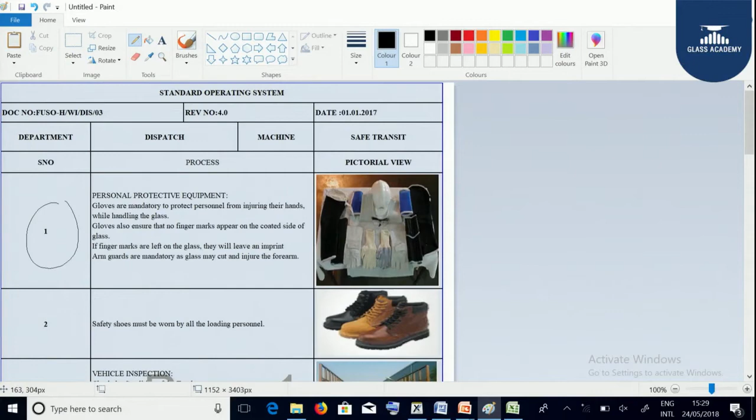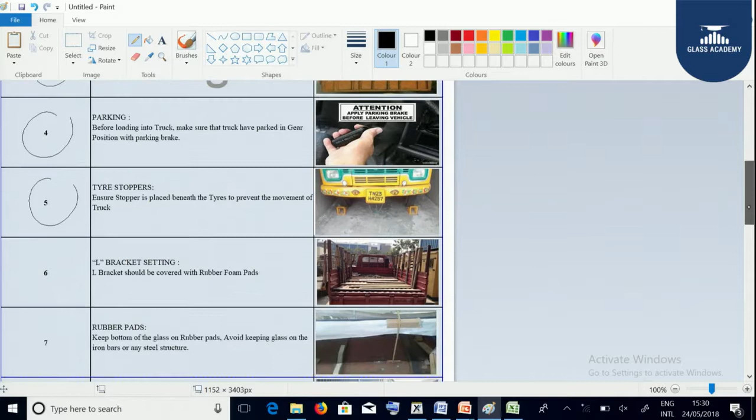Now we are going to understand the standard operating procedure we follow at dispatch. We need to understand the PPEs required at the time of loading, and the safety gear that we need to wear at the time of loading. We need to understand the vehicle and the parking, and we need to have tire stoppers so that we are avoiding the movement of the trolley and the truck. You can see here the stoppers.

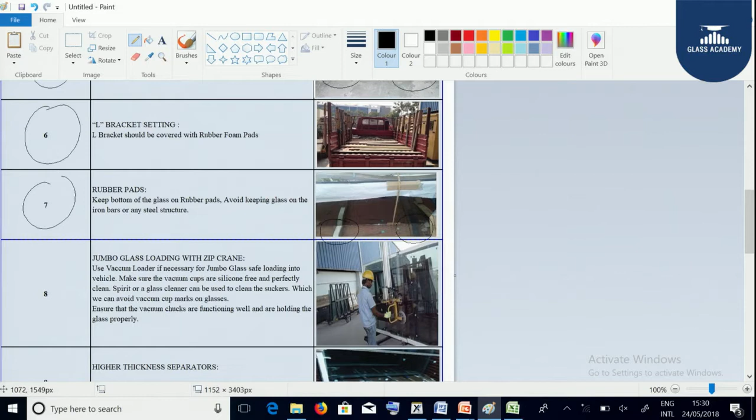Next, the L bracket setting to be used should be covered with rubber and foam pads. Rubber pads should always be used. Keep the bottom of the glass on rubber pads, avoiding glass on iron bars or any steel structure. You can see in the figures the glass is resting on the rubber pads. Jumbo glass loading is to be done with zip cranes to avoid human injuries. You can see here with the help of zip cranes the jumbo glasses are getting lifted.

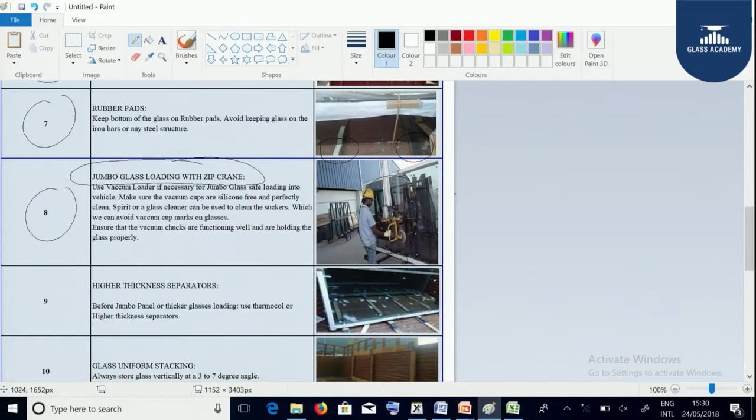And for higher thickness glasses, always use more interleavings. If required, you can even go for thermocol packing so that you are maintaining a proper gap between the glasses. You can see here in the figure the glasses are getting packed with thermocol interleaving. Next, glasses should have uniform stacking, and the stacking should be at a 3 to 7 degree angle.

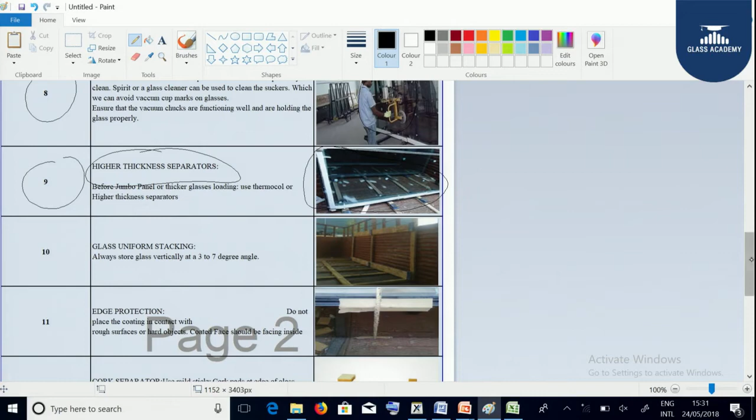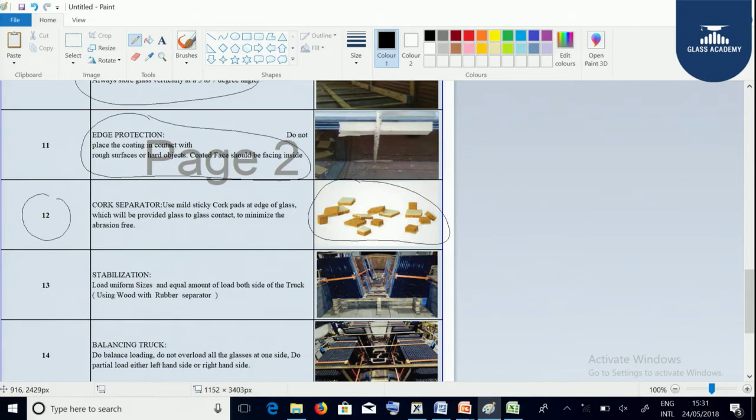And we should make sure that the edges of the glass are always protected with cartons. Between the glasses we should always use a cork interleaving, rubber separator or thermocol. We should make sure that there is stabilization of the glass and the vehicle. Load uniform sizes and an equal amount of load on both sides of the truck using wood with rubber separators.

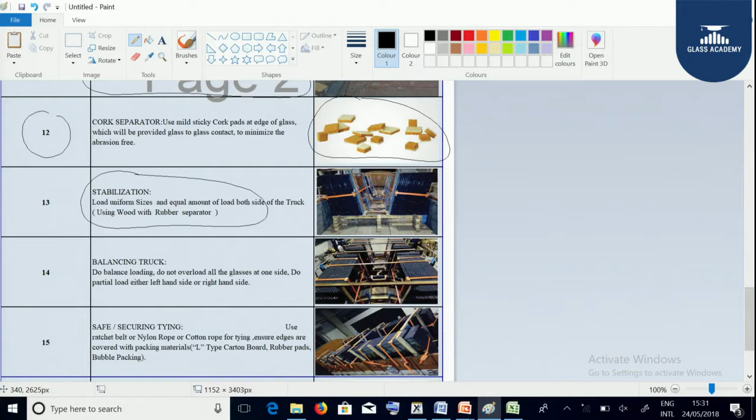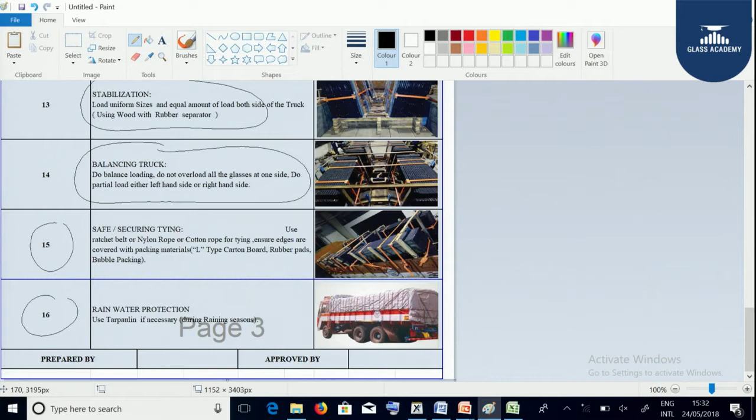Next, we need to understand the balancing of the truck. We should not keep loading on one side of the truck and leave the other. There should always be uniform balancing of the load inside the truck. We should also see how we are packing and tying the glasses and the vehicle. We should use a ratchet belt, nylon rope or cotton rope so that there is no movement of the glasses, and the glasses are stacked at an L angle. Next, we need to make sure that during the rainy season the glasses are covered with a tarpaulin.

Next, we need to ensure the parking. Before loading into the truck, make sure that the truck is parked in gear position with the parking brake. Tire stoppers: ensure stoppers are placed beneath the tires to prevent the movement of the truck. L bracket setting: the L bracket should be covered with rubber foam pads. Rubber pads: keep the bottom of the glass on rubber pads. Avoid keeping the glass on iron bars or any steel structure.

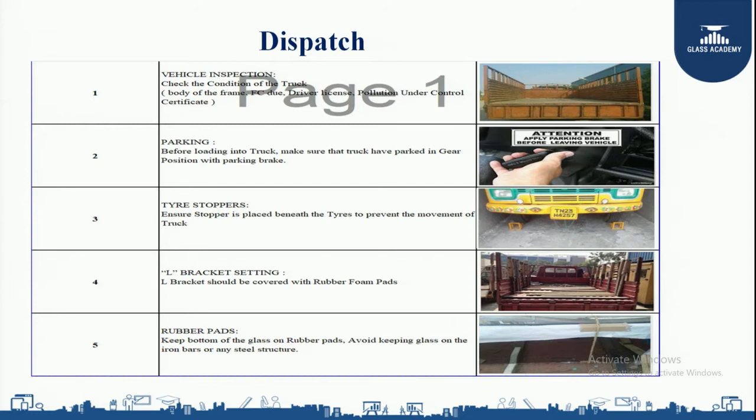When you are doing jumbo glass loading with a zip crane, use a vacuum zip loader if necessary for safe loading of jumbo glass into the vehicle. Make sure the vacuum cups are silicone free and perfectly clean. Spirit or glass cleaner can be used to clean the suckers, so we can avoid vacuum cup marks on the glass. Ensure that the vacuum chucks are functioning well and are holding the glass properly.

For higher thickness glass, higher thickness separators. For jumbo panels or thicker glass loading, use thermocol or higher thickness separators as interleaving to maintain a proper gap between glass and glass. Glass uniform stacking: always store the glass vertically at a 3 to 7 degree angle. Edge protection: do not place the coating in contact with rough surfaces or hard objects.

Coated face should be facing inside always. Cork separators: use mild sticky cork pads at edges of the glass, which will prevent glass to glass contact to minimize abrasion.

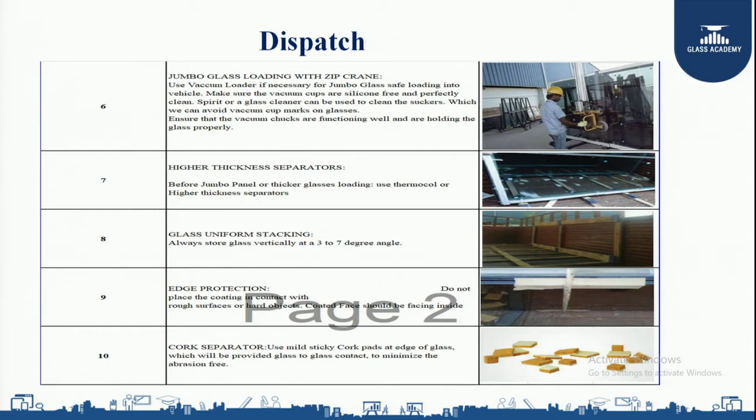Stabilization: load uniform sizes and equal amount of load on both sides of the truck using wood with rubber separators. Balancing truck: do balance loading. Do not overload all the glasses at one side. Do partial load either left hand side or right hand side.

Safe secure tying: use ratchet belt or nylon rope or cotton rope for tying, ensuring edges are covered with the packing material: L-type carton board, carton board or rubber pads, bubble packing. Rainwater protection: use tarpaulin if necessary during rainy seasons.

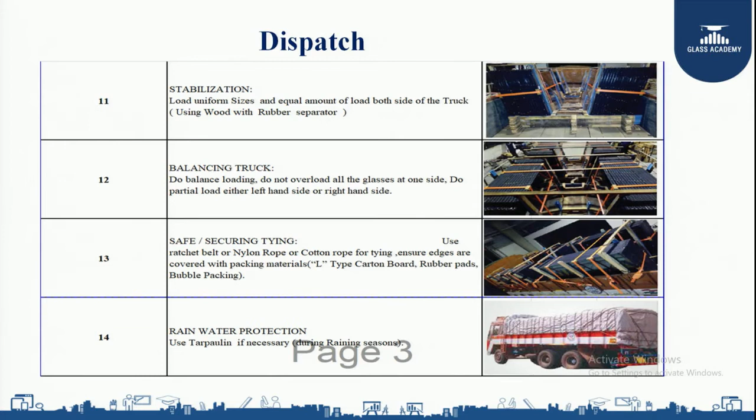And whatever we have discussed so far, we are incorporating in our final inspection report. It says, first the customer name, the order details, the destination, the project name, the dispatch quantity, the work order quantity, transporter, vehicle number, the description of the material, whether it is an annealed glass or a toughened glass or

a laminated glass or a double glazing unit, whether the glass is having any scratches or chipping, back support is properly provided, any coating defect is there, pinholes are there, glasses are as per drawing, sizes are verified. If it is a double glazing unit, primary sealant, secondary sealing, all these are checked in the final inspection.

Next we will be checking the packing system, open packet dispatch or a crate packing dispatch. We are also ensuring what separator we are using, whether it is a button separator or a paper separator, how the loading pattern happened, that is from bigger to smaller,

what type of cushioning is given to glass, how we are going to tie the glass, belt or rope, polythene is covered or not, back support is given or not, wood stabilization is given or not. All this we are ensuring at the time of packing.

As we have discussed, we are even recording the truck conditions, whether it is a half body or full body, wood flooring or iron flooring, capacity in tonnage, floor condition, tarpaulin, angle, vertical and horizontal strapping.

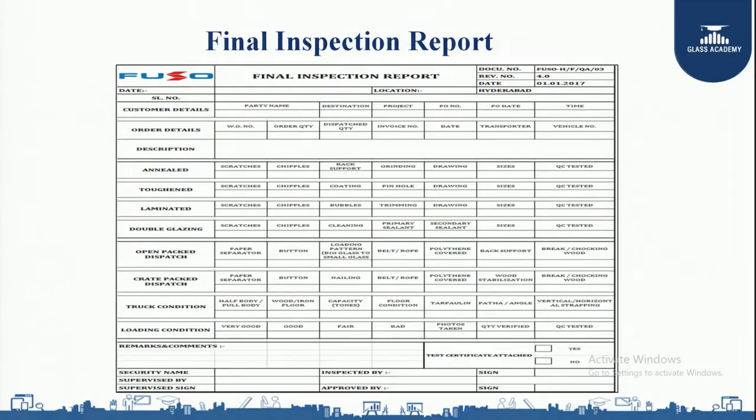And as per the observer, whether the loading is very good, fair or bad, whether photos have been taken or not, quantity is verified as per the invoice, QC is tested, all we are incorporating in the final inspection report. Now this is the final dispatch area where we are going to

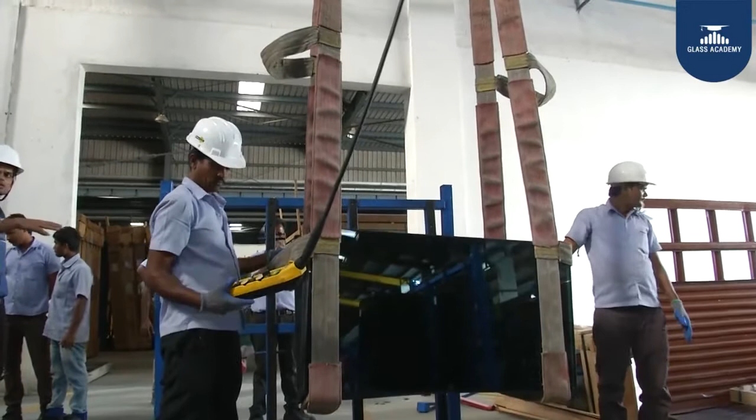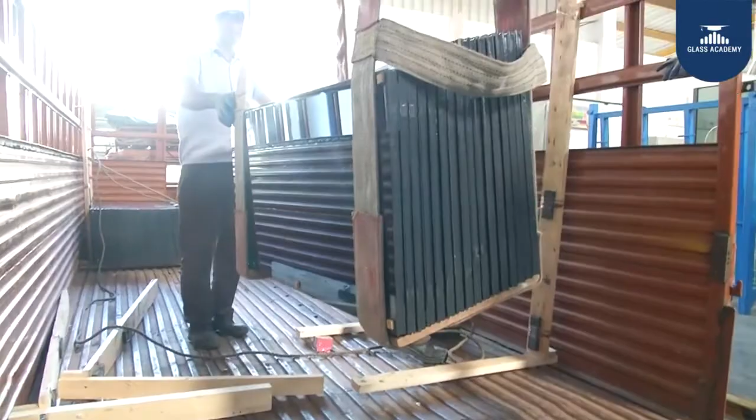Now this is the final inspection. The glasses which are ready are getting loaded into the vehicle. So if you see, they are placing L racks or L angles so that the slanting of the glass is at 3 to 7 degrees, and in between the glasses they are keeping a separator interleaving.

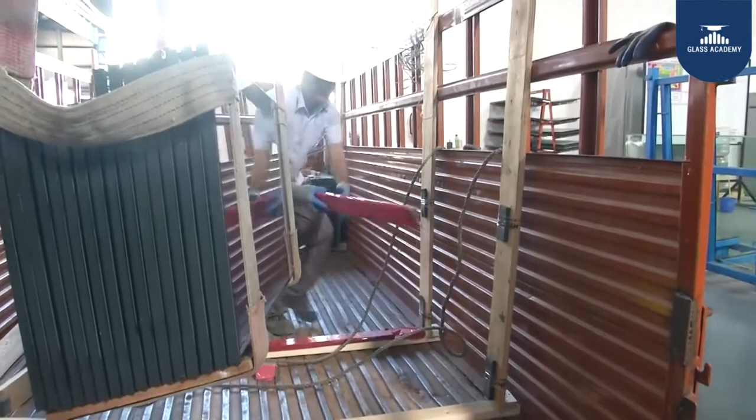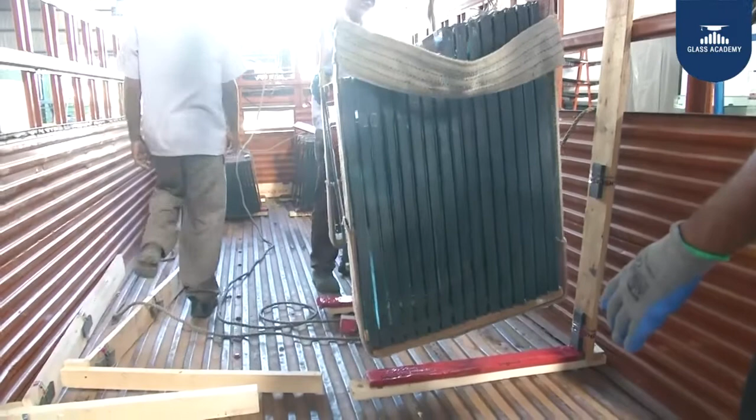They are giving bottom as well as side support with the help of jolly boards. Always we need to make sure that first the bigger panels are loaded, then the smaller panels are loaded, and we need to maintain the balance of the glasses. We need to see the floor condition of the vehicle also.

And always we need to have the balancing of the vehicle. Once the glass is loaded on the left, then we should load on the right, then again left, again right. We need to maintain the balance of the vehicle.

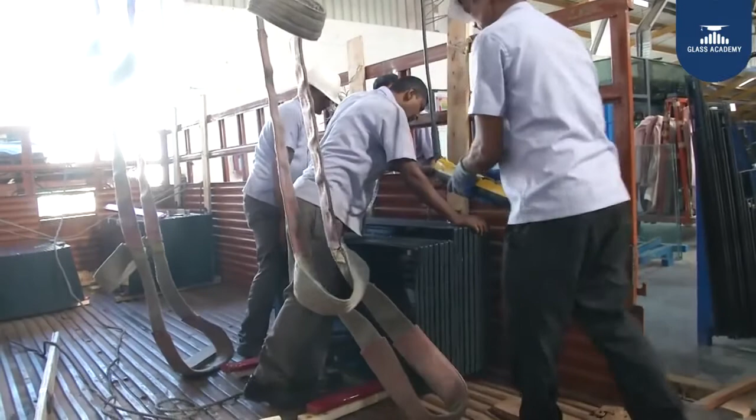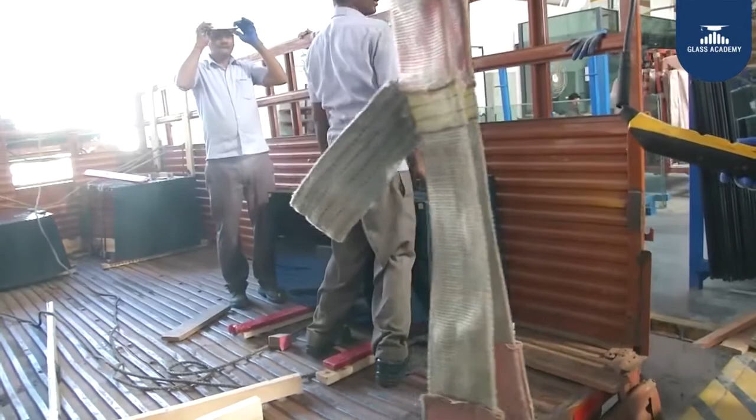Okay. That also you take. Inside vehicle you go.

You can see all the glasses are stacked as per the dimensions and sizes, and in between the glasses you can find the separator which acts as the interleaving. And you can see they are applying these cardboards to protect the edges of the glass, and the bottom support also they are giving with the rubber cushioning.